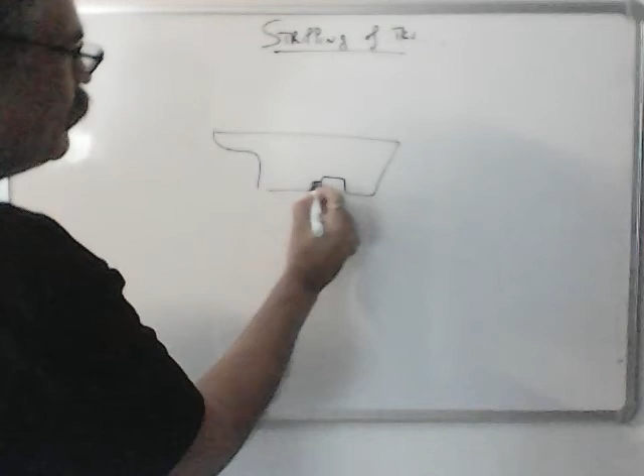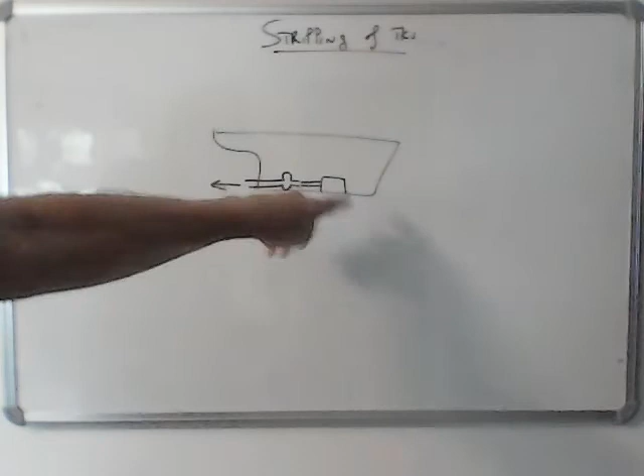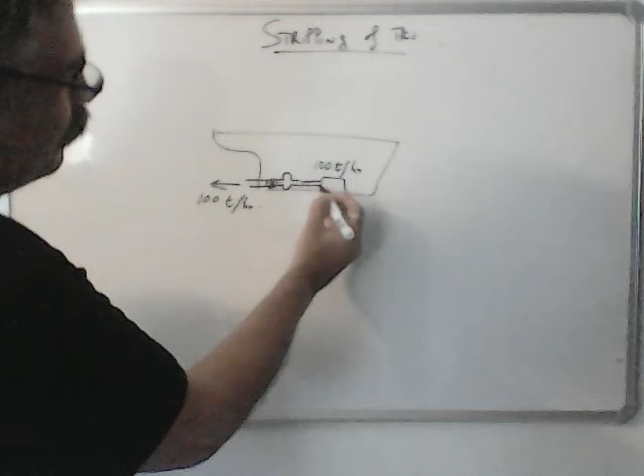So initially the ballast pumps can take suction at the rated capacity and discharge. Let's say 100 tons per hour suction capacity and discharge is also at the same rate. Discharge valve is fully open. But once the sounding comes down to around half a meter or so, then the water flows to the bell mouth very slowly. If I make this bell mouth here, this is the time.

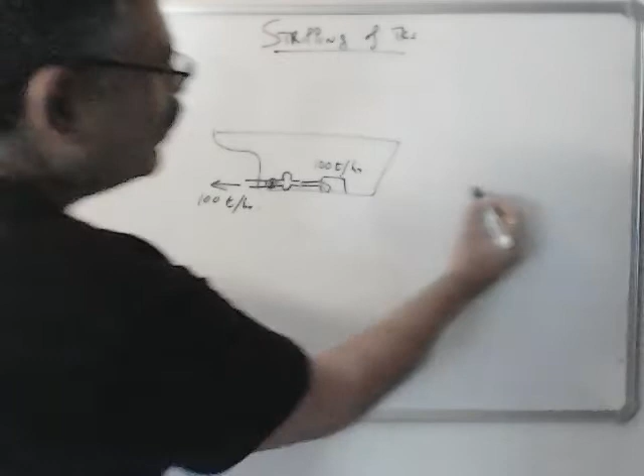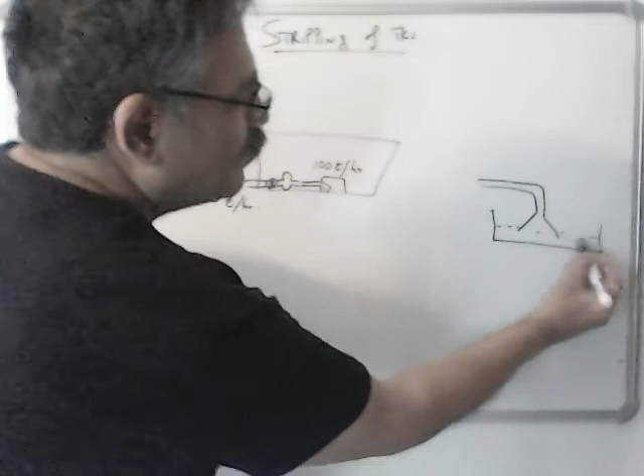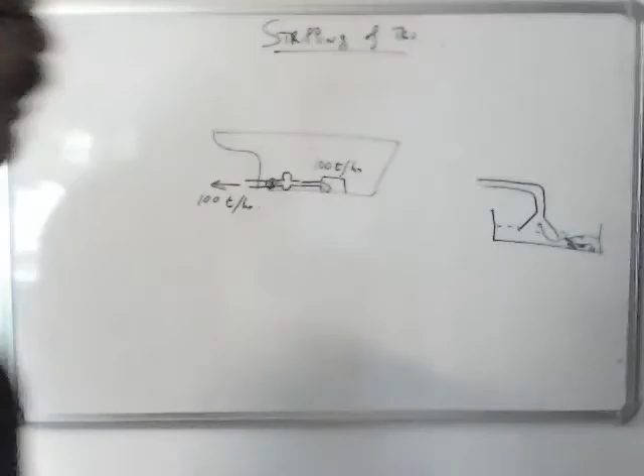Water flows to the bell mouth very slowly because there are lightening holes and mud at the bottom of the tank. So some air might be sucked in along with the water. So we have to reduce the suction rate. This 100 tons, we might have to make it to 50 tons.

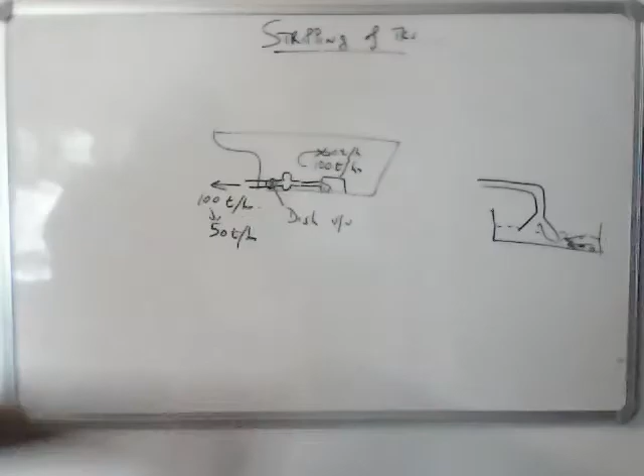So this can be done by one method, which is throttling of the discharge valve. This discharge valve, if we throttle it, then the discharge rate might come down to, let's say, 50 tons. If discharge rate comes down to 50, then suction rate also comes down to 50. So rate of suction becomes less and you can continue. Later on you can throttle the discharge valve more, and in this way it is also possible to strip the tank completely dry.

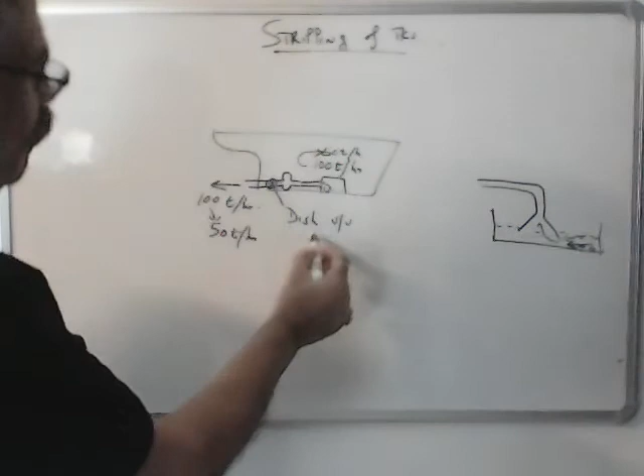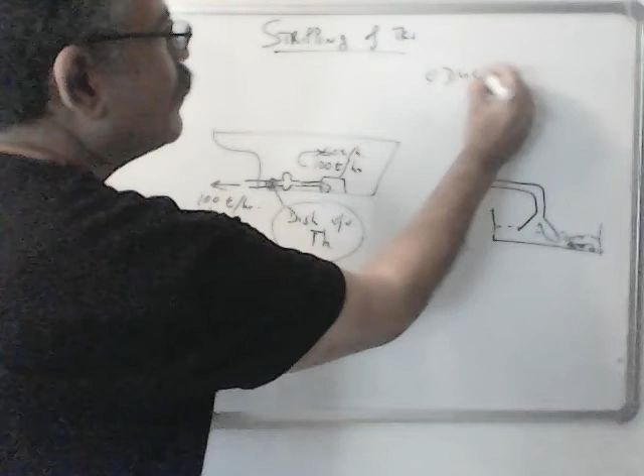Now some ships do not have the facility to throttle the discharge valve. Either it is fully open or fully shut. Then we use the second method, which is by eductor. So principle of eductor, let's discuss now.

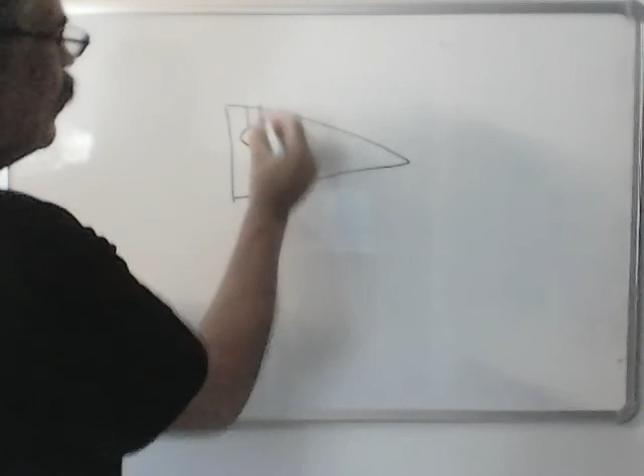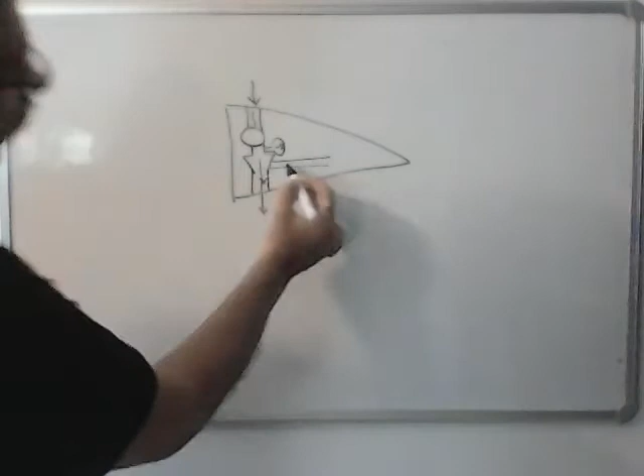If you have a ballast pump or fire pump running sea to sea, taking suction from the sea and discharge to the sea, and if you have an eductor here, and you have a pipe here, so as long as you have a water flow here, if you have a discharge pressure showing more than 5 kg here, so water is going sea to sea, and in this pipe you will have vacuum.

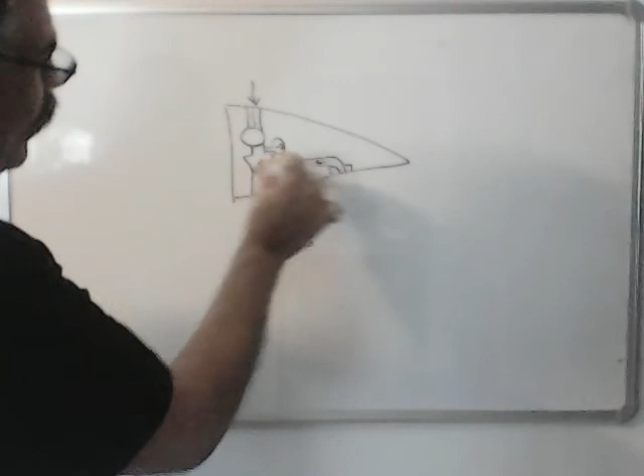This pipe could be connected to your DB tanks or cargo hold bilges, and then what happens, as the vacuum is created here, water is going sea to sea. This water mixes with this water, and both the liquids are pumped out. So this is the principle of eductor.

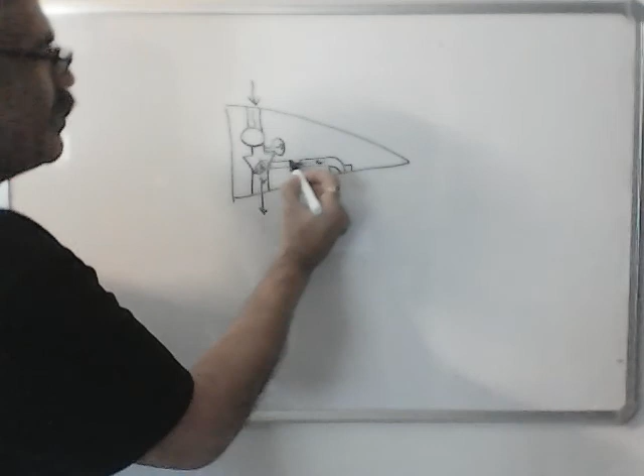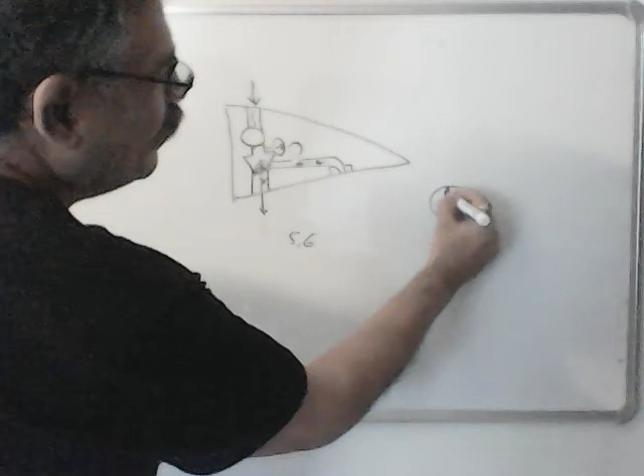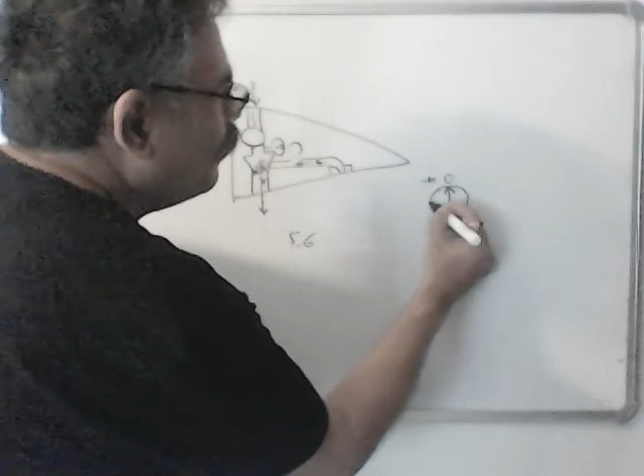Now here in the suction part of the eductor, there is another meter which shows you the amount of vacuum. So this meter, when you are having a good suction and water is getting stripped out from hold bilges or from the double bottom tanks, you have a reading 0, -10, and the maximum is -40, and then there is +10 here. So when the suction is good, you will get a reading of approximately -10.

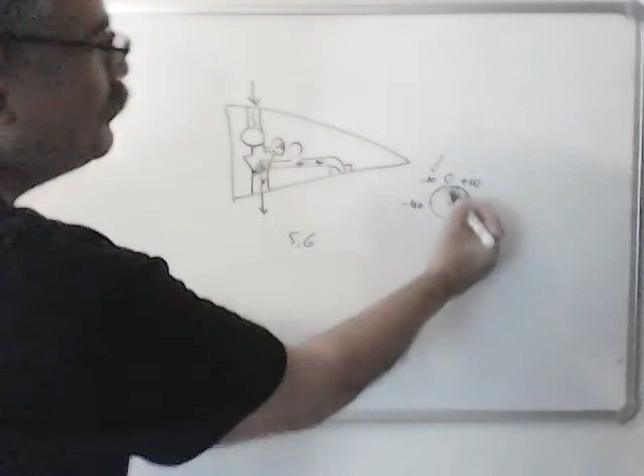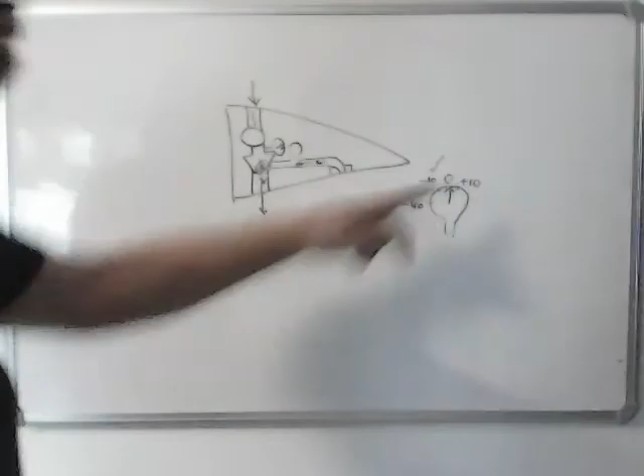And once this -10 comes to 0, what does it indicate? That it is taking in air. So probably the tank is dry. That is one method to find out if the tank is dry. From -10 it comes to 0. Another method is by taking soundings of the tank.

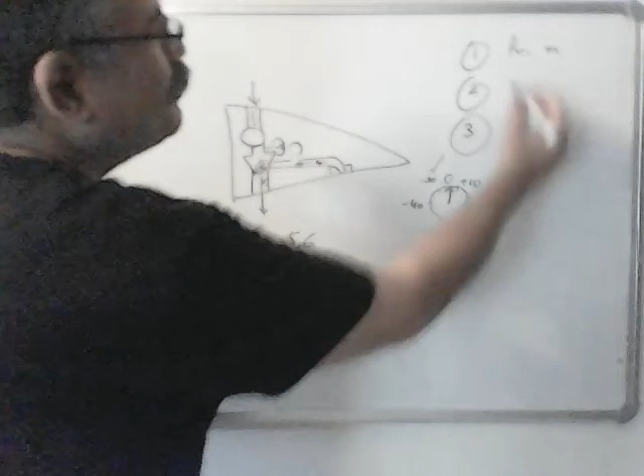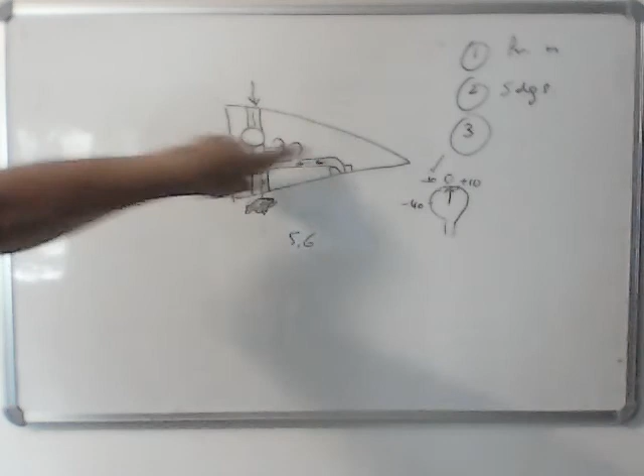So there are three methods to find out if the tank is dry. First is by watching the pressure meter of the suction pipe. Second method by taking soundings. And the third method is, if you see here outside the ship, you will find a lot of turbulence and air bubbles. That indicates air is being sucked in, tank could be dry. So air bubbles. This is also one method.

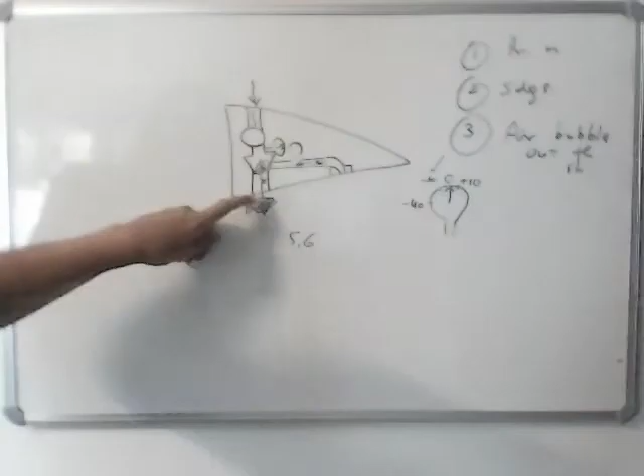Outside the ship, you should know the location of this pipe. Either it's on the starboard side or port side, whatever. Now this suction meter, if it shows -40, this is the maximum vacuum. What does that indicate? That could indicate that either the tank valve is fully shut because you're getting maximum vacuum here, or if it is cargo hold bilges, it could be that the bilges are clogged with cargo. So that has to be checked.

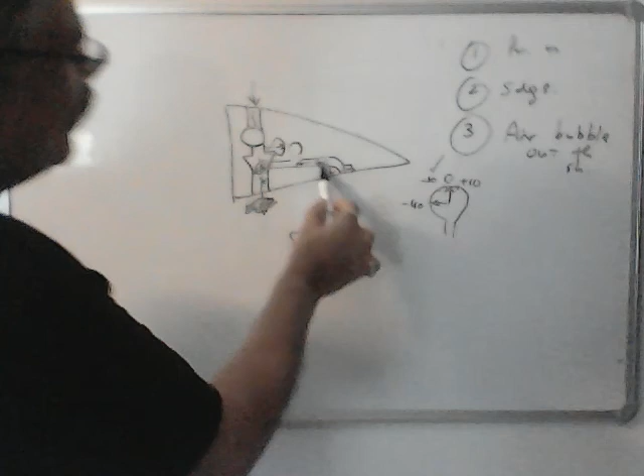So initially, when you start this sea to sea, it is always better to close all the valves just for a few seconds and ensure that this vacuum comes to -40 or -35, which indicates there are no leakages, perfect vacuum is there. And then you open one tank or one cargo hold bilges valve, whichever you want to strip. This is the principle of eductor.